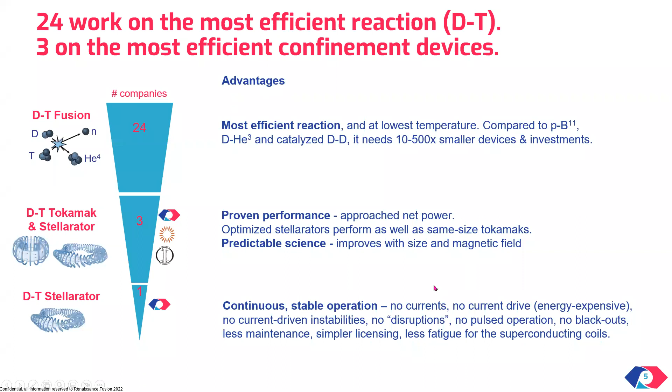This rotational transform in a stellarator is generated without using a solenoid in the center, but rather by deforming the coils. Early stellarators used to rely on helical coils that helically twisted the plasma and, as a consequence, the field lines.

More recent stellarators replace these sets of toroidal field coils and helical field coils with so-called modular coils, which I'm sure you have seen in pictures from Wendelstein 7-X.

These modular coils were originally introduced as engineering innovations to avoid very large helical coils, but they opened up a big space of new stellarator configurations, basically paving the way to stellarator optimizations with confinement comparable to tokamaks. So stellarators have reached tokamak-like confinement.

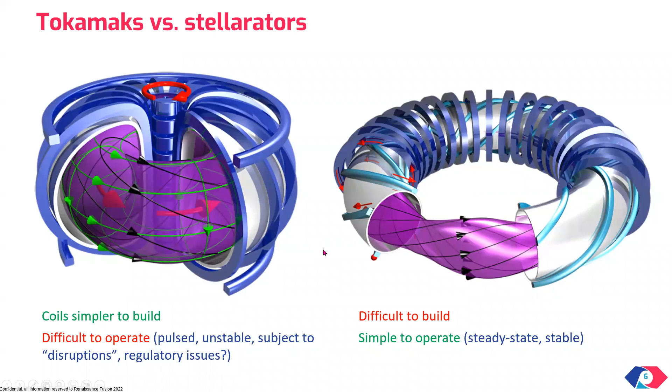The only Achilles heel of stellarators is that they are difficult to build. These modular coils are difficult to build, and this is in fact one issue that we tackle—the main issue that we tackle at Renaissance Fusion.

In the funnel that you saw before, as we were going down and explaining how we came up with this idea of making a deuterium tritium stellarator company, I was listing all the advantages. But as you go down in that funnel, at every choice, there are also challenges or issues.

So if you adopt deuterium tritium, you have to deal with the fusion neutrons that induce radioactivity in the solid parts of the reactor. Our solution to that is plasma facing liquid metal walls that absorb most of the neutrons.

By relying on tokamaks and stellarators, these devices are known for being large, and we make them smaller by means of strong fields generated by high temperature superconductors, or HTS. And finally, stellarators have a reputation for being complex, and here comes our simplification.

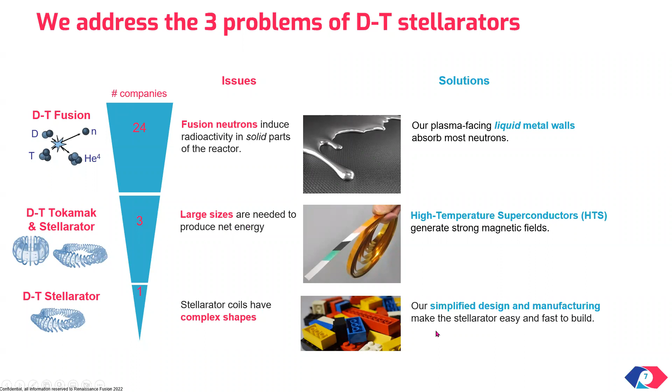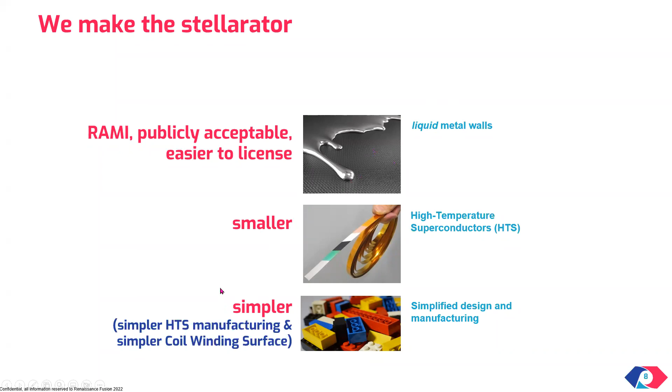So in summary, we are working on making the stellarator reliable, accessible, maintainable, inspectable, publicly acceptable, easier to license by means of liquid metal walls, smaller by means of high temperature superconductors, and simpler. Now, simpler here means two things, simpler HTS manufacturing and simple coil winding surfaces.

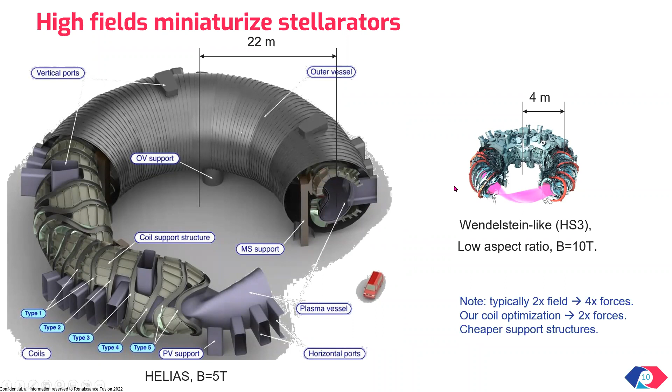Let me, so this is just an illustration of how dramatic the miniaturization can be. Let me start by explaining our innovative technique for simplified HTS manufacturing.

And for that, I need to start with the traditional technique of HTS manufacturing. So normally people take tapes, similar to tapes in audio cassettes, for those of you who remember that. So these tapes go back and forth in various machines where they are coated with various layers by chemical and physical vapor deposition processes.

The important layer, by the way, is the one here in black, REBCO, rare earth barium copper oxide. All the others have other functions. Then these tapes are combined in cables.

These cables are wrapped around to form a coil, and in the case of a stellarator, this is a non-planar coil wrapped on a non-planar table. These coils, by the way, are fabricated with millimetric or submillimetric precision, and these are objects several meters in size.

And then with submillimetric precision, they are positioned around the fusion device. So this is the traditional way.

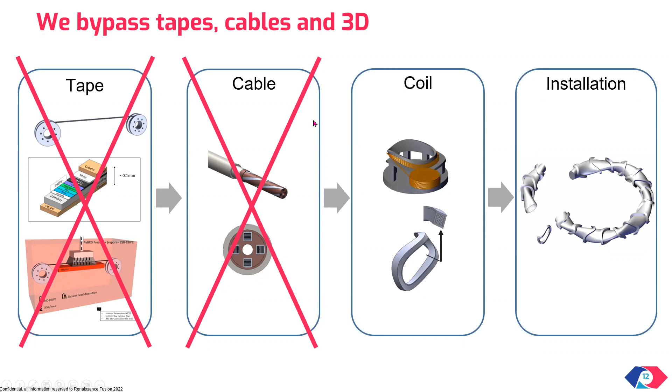We bypass the concept of tape and cable at Renaissance Fusion, and we directly deposit the coils on the vacuum vessel as follows. So we have two machines instead of 7, one for physical vapor deposition, depositing some layers, another for chemical vapor deposition, depositing other layers, in fact, multi-layers.

So in our stack, there is not only one, there will not be only one REBCO, but several REBCO layers. So this in itself is already an improvement. The process is much faster.

So the result of this deposition on cylinders is a cylinder that superconducts in any direction, in principle. But since we want the current to follow a specific pattern, what we do is with a laser, we engrave this cylinder. Effectively, we draw a printed circuit on this cylinder.

So these corrugations will guide the current on these cylinders, such that an array of several cylinders generates a stellarator field. Notice that the 3D geometry, or the 3D shape of the coils, has been replaced by two 1D manufacturing processes.

So the rotation of this cylinder, which is a 1D movement, and the scan of the laser left and right, which is also a 1D movement.

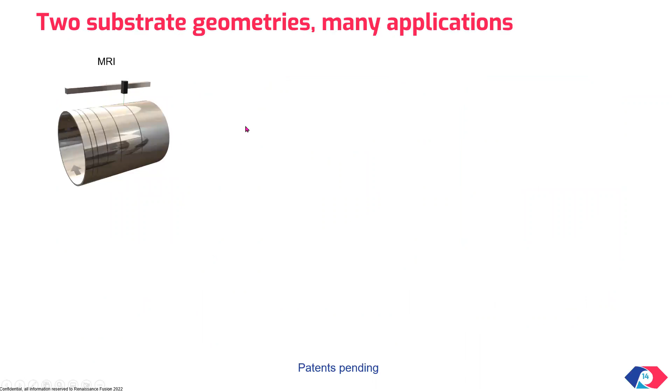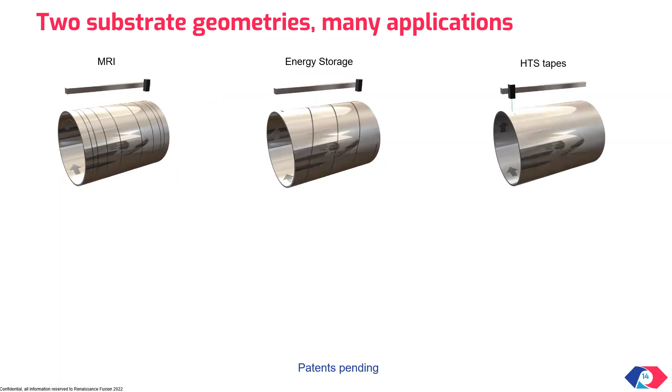This technique has advantages also for other technologies. At the end of the day, it's a gigantic superconducting printed circuit, and for different applications, different magnetic applications with different magnetic geometries, you just need different corrugation geometries, as illustrated in these videos for medical imaging, energy storage.

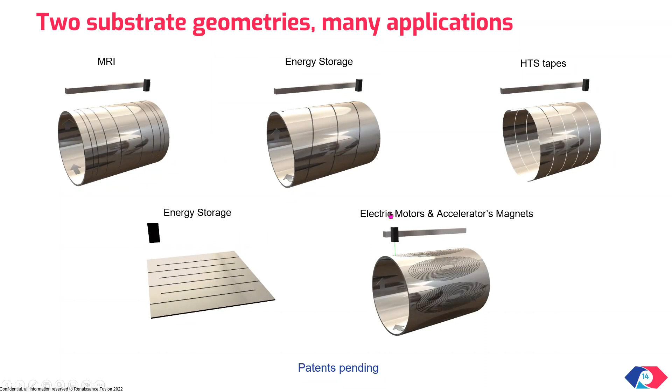You can even make tapes if you want. You don't just engrave on the surface, you cut all the way across the cylinder. And applications, of course, to electric motors, generators, and magnets for accelerators.

Conformal here means just parallel and expanded. For good reasons, by the way, because obviously higher order multipoles decay more rapidly with distance.

So by adopting a close-fitting coil winding surface, you avoid the issue that by being too far, you need a lot of coil shaping for the same amount of plasma shaping, which is good. The problem is that now these surfaces, and as a consequence, the coils, are very complicated.

Historically, coil winding surfaces were not that complicated, and in a way we think we can go back in time. We think some simplified surfaces can be more than sufficient, in particular piecewise cylindrical surfaces, which enable the idea of patterning directly on the cylinders.

In the next slide, you see a comparison of the performance of this conformal coil winding surface on the left and the piecewise cylindrical on the right. What you see on this axis is a metric of complexity on the surface. Not surprisingly, adopting a simpler surface, cylindrical versus conformal, results in higher complexity on that surface. Rather than adopting a complicated surface and simplifying the pattern on it, we prefer to adopt simple surfaces and therefore simpler manufacturing, at the expense of more complex patterns on those cylinders.

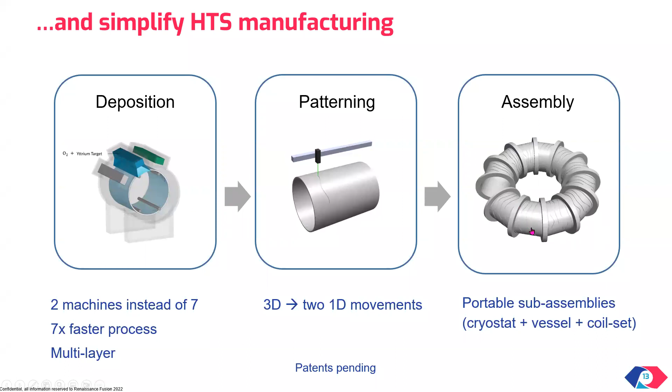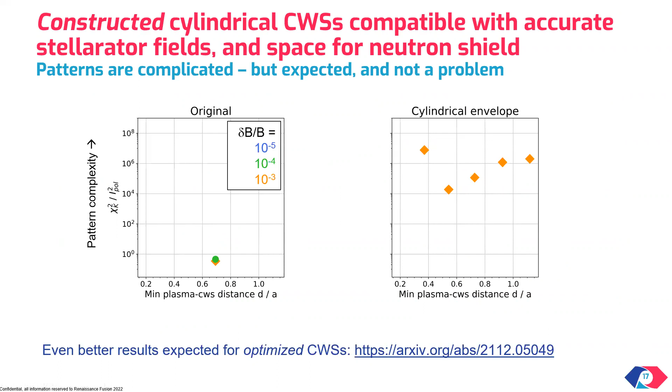At the end of the day, this means that on those cylinders you will need a more complicated zigzagging than you would have with 3D surfaces like the one in blue. That's it, but the laser doesn't care about it. This is for surfaces that have been constructed by trial and error, but with numerical optimization, we can do even better.

So we stop the neutrons. Liquid metals fall from the top of the cylinder, and they are forced to flow along the walls of the cylinder by means of J cross B forces, pushing it radially outwards along the cylinder. Because we have a strong B for free, we just need to apply a relatively modest J in that flow by means of electrodes.

Let me try to play this video, let's see. I hope you can see it. When we turn off the system, the liquid metal detaches from the cylindrical substrate. This is gallium indium tin, on a small cylinder of 60 centimeters diameter, but the basic principle is there. This is a 1 centimeter thickness.

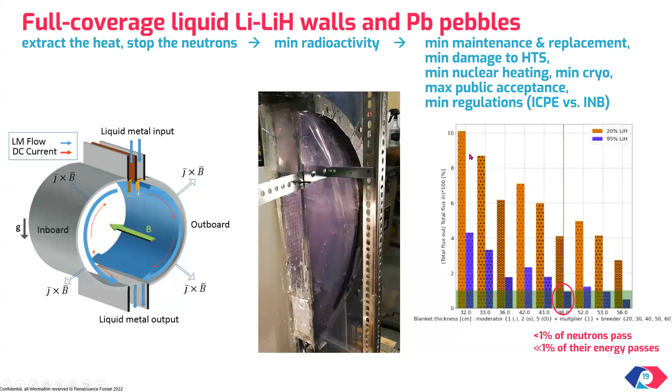I should say the thickness needed in a fusion device is on the order of 40 centimeters, for reasons of stopping the vast majority of neutrons and the energy they carry. By this liquid metal flowing wall, we minimize damage to the HTS. We minimize induced radioactivity in the device and therefore maintenance and replacement. We minimize nuclear heating, requirements for cryo, and maximize public acceptance because this minimizes radioactivity and regulations. So there are several advantages, and one bonus is that the extraction of tritium is facilitated.

So our wall is made of lithium hydride with suspended pebbles of ceramic containing lead. And why lithium hydride, you might wonder? Well, for reasons of reducing the thickness of the wall, but also it has a bonus, as I was saying. This is the phase diagram of lithium hydride, temperature on this axis, concentration of lithium hydride on the horizontal axis.

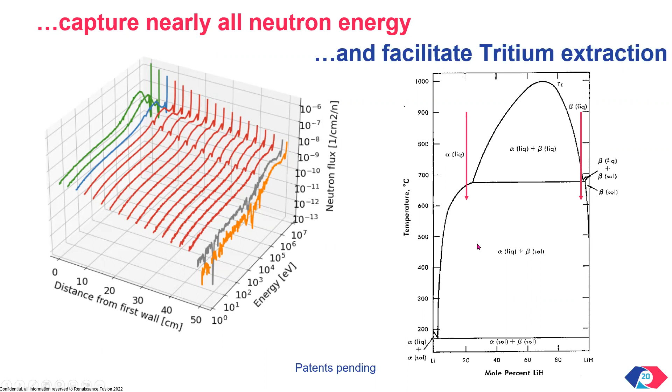The liquid metal is inserted in the stellarator at 700, it warms up to 900, then gets extracted and needs to be cooled down. Again, we need to extract the heat, we want to extract the heat. So in the process of cooling it down, if you cool it down a little bit further, you cross this phase transition by which lithium hydride and its chemical equivalents, lithium deuteride and tritide, precipitate. As a matter of fact, if you do it carefully enough, you precipitate only the lithium tritide. Carefully means fine control of the temperature. So you extract relatively easily the lithium tritide, and after that, the tritium.

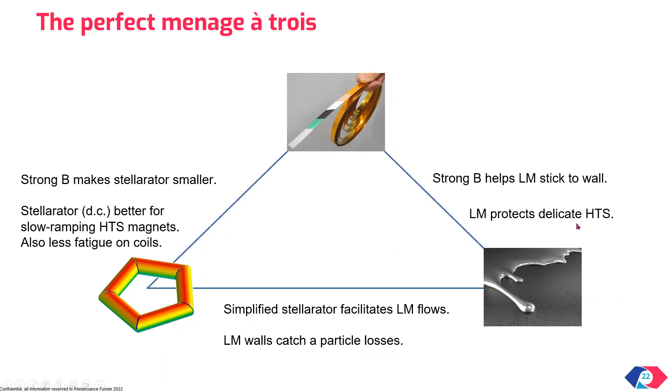I would like to say this is not just a random collection of 3 good ideas. These are 3 ideas that synergize very well with each other. Without entering into many details, I'll give one example: the strong magnetic field generated by the HTS helps the liquid metal stick to the wall, and the liquid metal protects the delicate HTS from neutron bombardment and damage to the crystal, which would degrade their superconductivity.

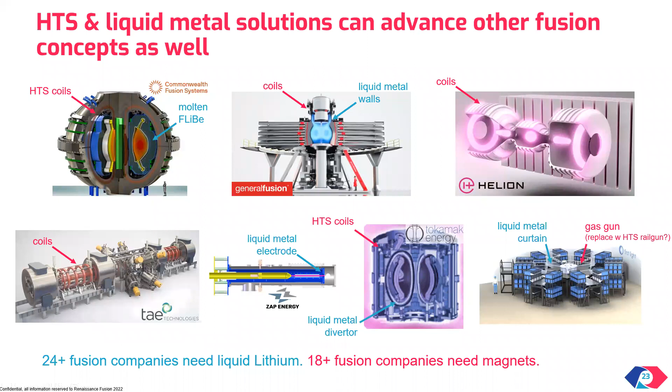This 3-pillar approach, I think, is more general to the fusion industry. Various fusion companies are pursuing different concepts, and it's not excluded, at least in my opinion, that the reactor of the future might have the divertor developed by one company, the materials developed by another, the coils from company C, etc. So this focus we have on HTS and liquid metals might indirectly facilitate the success of other companies which are also relying on, or might rely on, HTS and liquid metals in the future.

So this is our roadmap. We have a 3-phase approach. We want to put electricity in the grid in a retrofitted power plant, in a coal or a fission power plant, a dismissed power plant, 1 gigawatt electric. We are a bit unusual in that sense. If people are interested, I can explain why we are targeting such high power.

How do we get there? By first demonstrating the building block of these stellarators, these cylinders. So this is our big objective in 2 years from now, to put together the HTS technology and the liquid metal technology. So this is a cylinder with HTS deposited on the outside, generating a strong magnetic field, and having on the inside the liquid metal flowing as shown before.

So to give an idea, this is a 1 meter diameter, 1 meter long cylinder. Enough to start building a small stellarator. Then as we learn to build larger and larger cylinders, eventually we will build the actual power plant, also based on what we learn from the smaller experiments. So by the time we are ready with these cylinders, we want to be ready with a stellarator design. We are working on that right now, and we're modeling the stellarator right now.

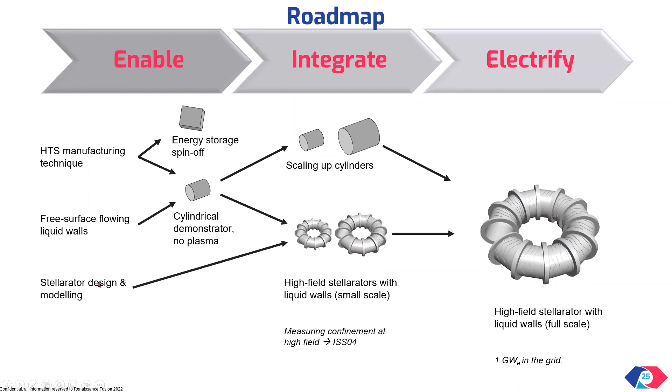So we have opportunities in all 3 pillars, technological areas. Some of them are listed here. Others can be discussed if you just shoot me an email. In general, we are looking for talented, bright, energetic, resourceful people. So from any age. And please do contact me later.

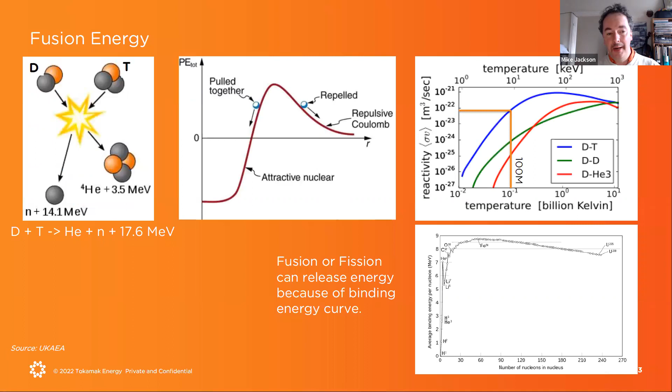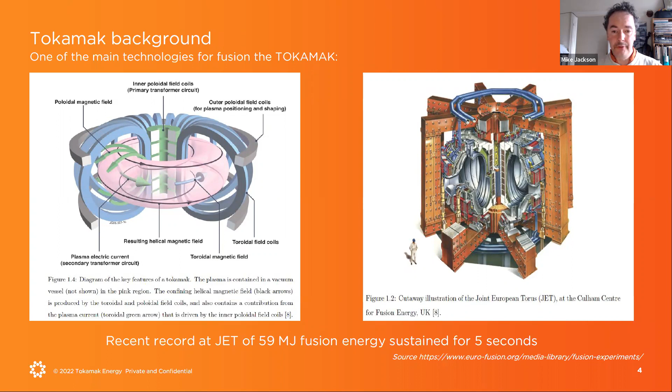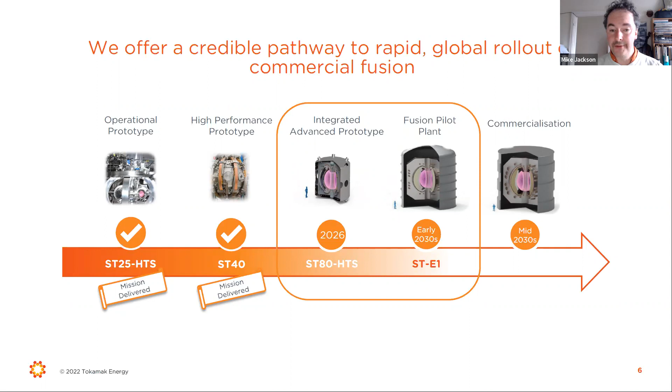This is our roadmap, if you like. We've already done ST25 and ST40. We've just announced we're going to build another one called ST80. So that's what the job is now.

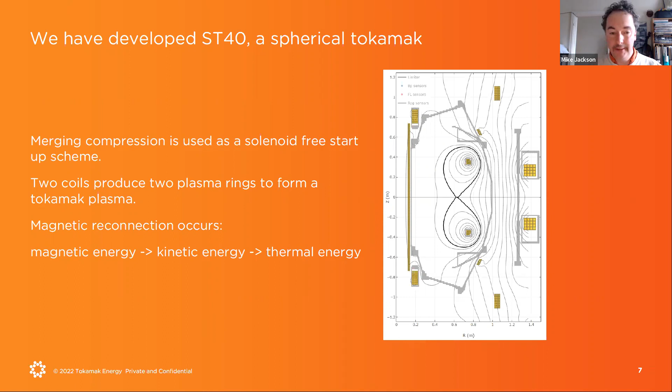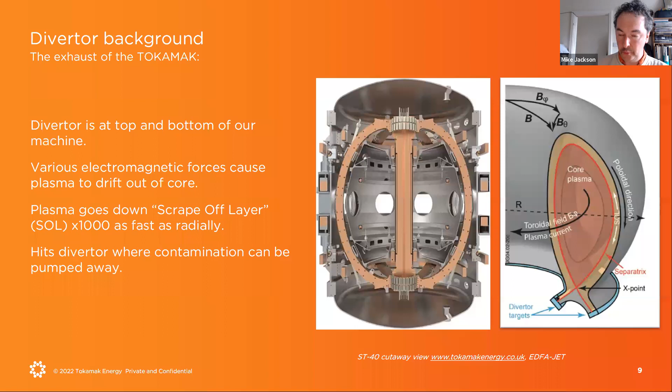So by introducing extra magnetic fields to cause this X point and crossover, you can have a divertor down at the bottom, and the transport down this scrape-off layer, just inside the last closed flux surface, means that all the ions whiz down the magnetic field and hit the divertor, where you can safely dispose of them. They're not going to go and damage your plasma too much, but it does mean that the divertor targets have to be able to deal with these really high fluxes of ions.

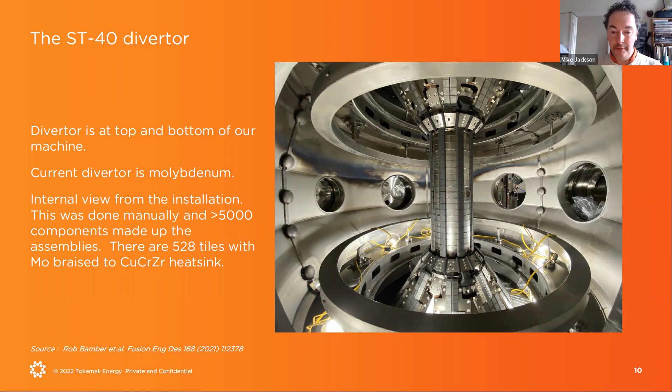And each of these is molybdenum brazed to a copper chromium zirconium heatsink. And actually, the engineering of this is remarkably complicated, and each bit needs research and development to get the braze right, to get the shape of the molybdenum, machining, everything else. So just to illustrate the kind of complexities we're dealing with. So I'm working in that team on the divertors.

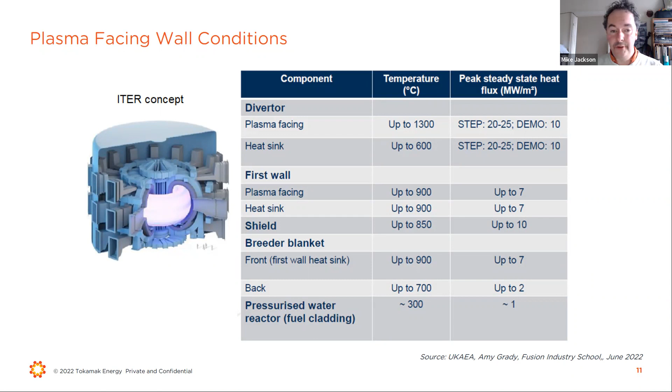Just a quick slide there to show the kind of temperatures and heat fluxes that we're going to be facing. Temperatures of hundreds of degrees and heat fluxes of tens of megawatts per square meter. That's a very challenging environment for the divertor surface. And these are the sorts of designs. These aren't Tokamak Energy designs. These are from the literature, but generally speaking, we're looking at tungsten. Molybdenum is okay.

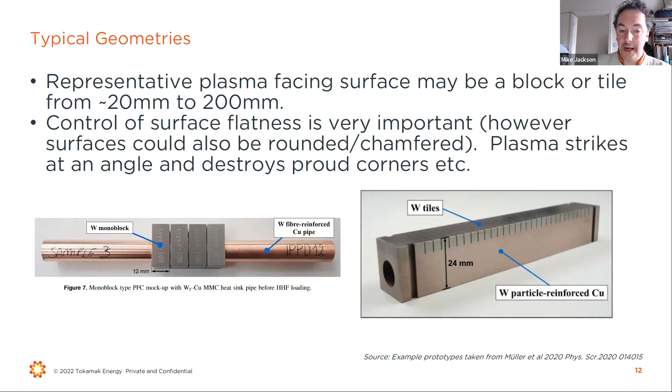Tungsten's better because the melting point's much higher. And on the left, we have a sort of monoblock design, which is a lump of tungsten that acts as the armor that resists the plasma. And then we've got copper to take away the heat, act as the heat sink. And on the right is a kind of tile design with the same kind of idea, armored tungsten on the top and copper below. I am skipping through these, but I'm hoping you're getting the kind of idea.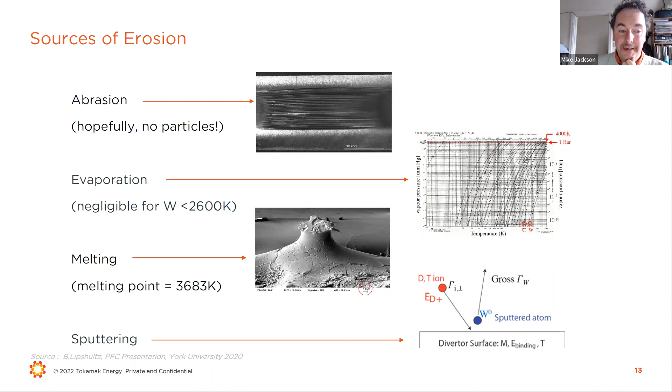This is the sort of thing I've been working on myself, the erosion of those tungsten surfaces. So again, I'm going to skip through it. We do have some time for questions at the end, so you can always shout and ask me stuff. Basically, this is telling us that you're going to get evaporation and melting if you get very hot events. And the main problem is sputtering, though, if you can contain those temperatures down to the sorts of temperature we want to keep them at. And sputtering is where your incoming ions are causing enough energy to go into the metal lattice and causing atoms to leave. I'm going to basically skip through all this.

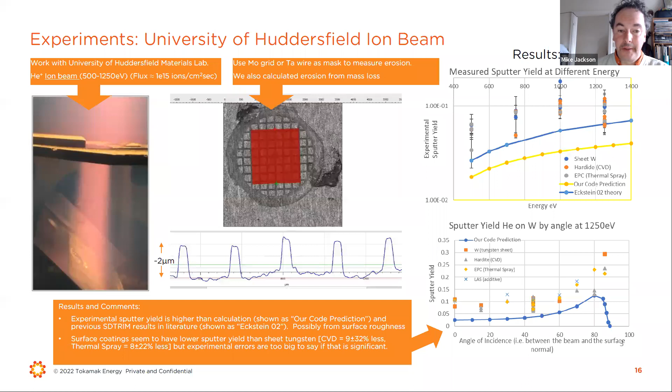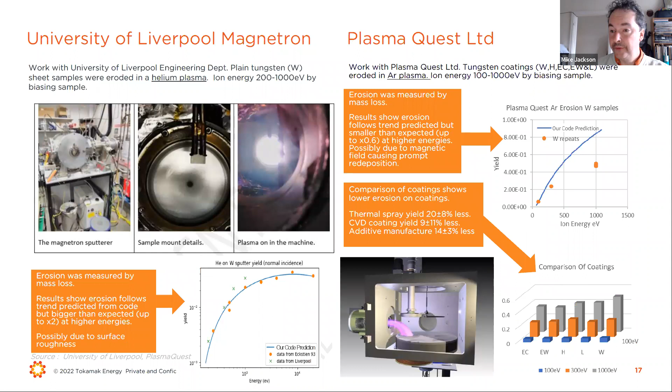I'm going to skip through these next 2. This is basically more research that we've done. And to show, we're collaborating with the University of Liverpool. We've been collaborating with PlasmaQuest, which is a private company that makes plasma ion sources, the University of Surrey as well. This thing's quite cool. It's a focused ion beam, but you can erode the surface again and have a look at the structure.

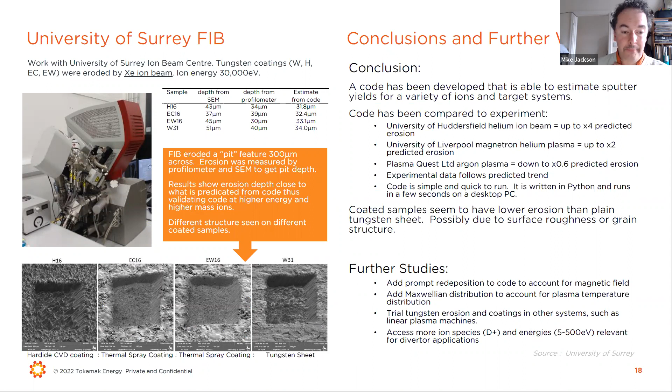And the agility and creativity angle is basically we're looking for inventive people, interested people, enthusiastic people that are going to come up with ideas and not be afraid to try them out. And it's a very supportive environment. So if you come up with totally crazy thoughts, that's fine. And if it all goes wrong, that's also fine as well, because we've always learned something.

There's a certain lack of diversity. Male-female ratio is a bit off in engineering in general. We've got a very diverse team. In the team I work with, we've got a person from Russia, one from the Czech Republic, 2 from Spain, 1 from Sweden, 1 from Malaysia. So we're very sort of diverse in that respect. But that's the whole point. We need more and more people with diverse and interesting backgrounds to come and join, really.

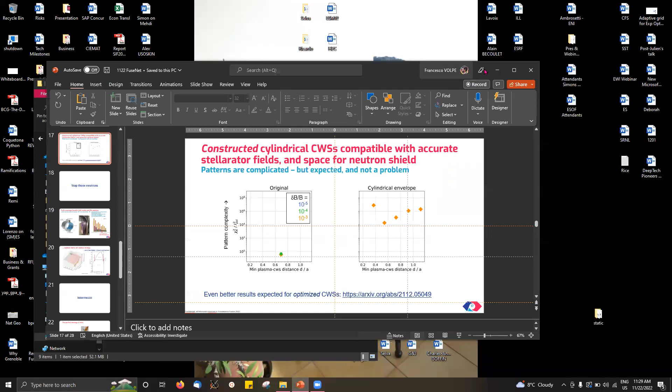Sorry about that. So this slide that I showed in a hurry was actually showing the color coding that tells these points have field accuracy of 1 part in 10 to the 3. For Wendelstein, for example, they achieved 1 part in 10 to the 4, in a particular way of defining delta B over B. I prefer not to enter into excessive detail, it might take too long, but we think with numerical optimization we will get there. Thank you.

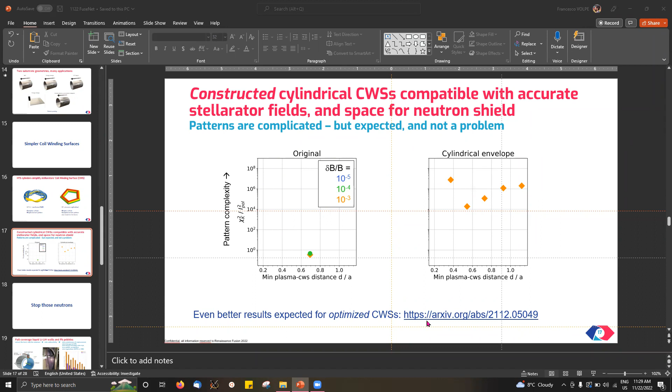Thank you. I'm going to take one last question because we're moving out of time. So there's one very interesting question here, I think for both of you: how does private industry balance the need for knowledge sharing to advance the fusion industry with the financial pressure to make advancements proprietary? I mentioned the funding you receive, also from private investors, so how do you cope with this relationship?

Well, for us, there's quite a lot of stuff that is common. Tungsten surfaces are pretty well known, so we rely on research done in the public sector, and we also publish our own data. That stuff I was showing is being published in a scientific journal. But certain things, if we identify a key invention, you patent it, and that gives you an income stream in the future. I'm sure Francesco noticed certain things patent pending in his presentation. We're exactly the same - certain things are patentable and hopefully will generate an income stream in the future. But an awful lot of it we share, we publish, and a lot we have to collaborate on. If we're collaborating with Liverpool University or whoever, we agree to publish this data at the beginning. That's kind of how we work.

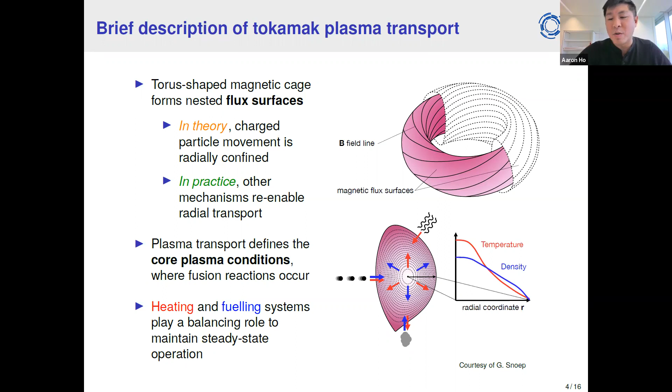So if I were to draw a very basic structure of what we're talking about, let's say we have just a finite volume in a 1D geometry, so things can only travel in one direction, more or less. We want to count how much is inside that volume. In the 1D geometry, there are things that can enter and leave the volume, and then there are things that may spontaneously be created or destroyed in the volume.

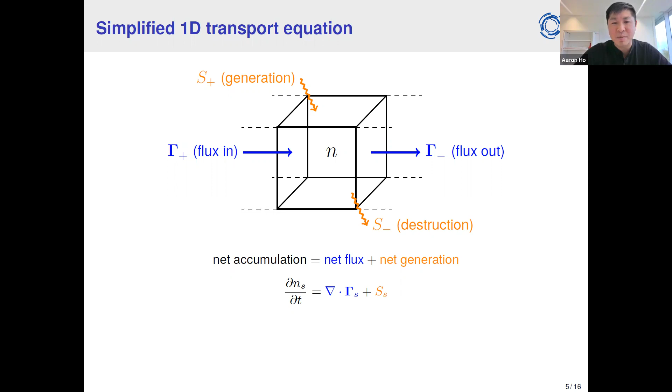So here's just some mathematical notation, but we can say that if we want to quantify the rate of change of this quantity in the volume, then it's just the summation of the net transport, the net flux that goes in and out of the volume, plus the net generation - what is spontaneously created minus what is spontaneously destroyed. This can be written as a very neat, simple equation, shown here with color coding to help you understand what each term means. Of course, this is extremely simplified, but it is what we consider the 1D transport equation.

This is also called the continuity equation, also called the conservation equation. Some people even call it a fluid equation because it's dealing with fluid quantities, but they all really mean the same concept as far as plasma transport is concerned.

And to add a bit of complexity on top of it already, we need one of these equations per fluid quantity - so this would be density, or temperature, or bulk momentum. And then we need to duplicate it again for each species in the plasma - so this is the electrons, the deuterium ions, the tritium ions, and then all the impurities as well that may be present. So this quickly escalates in the number of equations that we have to solve for a simple, even 1D, transport problem.

And of course, once we add multiple species, then we add cross-species transfer terms, which is like electrons interacting with ions, ions interacting with other ions, stuff like that. We usually stuff that into the net generation term, but that's just semantics - the fact is we still need to account for them.

So this equation gives you a very brief overview of how we would look at a plasma transport problem. It's basically just a balancing equation of how much is being moved from a volume, how much is being created from a volume, and then how much is just accumulating in the volume.

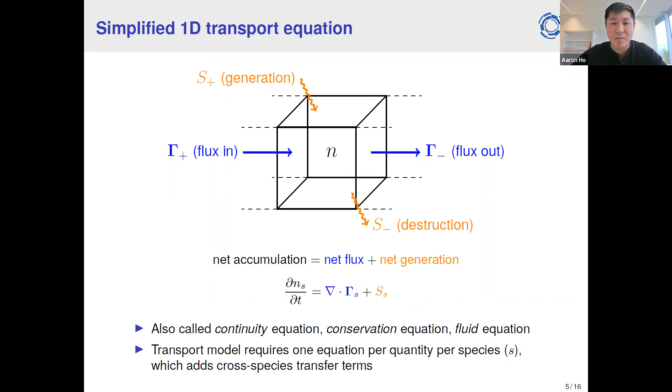But of course, I painted a very, very simple picture, because each of these terms - there's only two in the equation - is actually a collection of a number of different plasma physics phenomena, or just normal kinetic transport phenomena. And those each have their own codes and ways of calculating them. Of course, the actual numerical value computed by these phenomena, by calculating the physical equations that govern them, may depend on the values itself - so it may depend on the density and the temperature, and on these quantities for other species, etc. So it becomes very, very quickly a nonlinear system, which is intertwined and intercoupled.

So while I've laid out a very simple problem, once you get into the details, into the weeds, it becomes extremely complicated to keep track of everything and make sure everything connects well, because there's also different orders in which different time scales and length scales, in which all these phenomena behave, and making sure you account for all of that inside your numerical model gets quite interesting, let's put it that way.

And on top of that, there's also gaps in the theory. There are certain physical phenomena which we don't fully understand yet, or at least it cannot be fully explained from what we know from the equations we already have at our disposal. So the research usually results in phenomenological models, which are specific models designed to describe one observed phenomenon, maybe not from first principles, maybe empirically, but it describes only this phenomenon. And then you have to somehow translate that into its meaning for a transport equation before you can include it inside a model which does the solution of the transport problem.

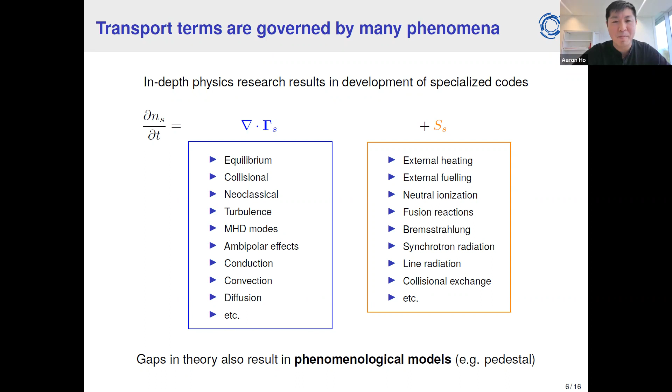One example of this is the pedestal itself, and for those unfamiliar we'll talk about it a bit later. But now you have all these different codes, all usually describing its own small specialized portion of the plasma physics, and we have to integrate them all together into basically one giant code.

which solves the transport problem. And this we call an integrated model, and each of these components we call sometimes modules, here in the italics. This process of combining all the different codes together combines the physics domain knowledge required to understand the code itself and how it interacts with the plasma, as well as a fair amount of software engineering.

because there's oftentimes numerical issues or certain parameters are not quite lined up. How do you do the connection of the different numerical schemes so that they're consistent with each other? All these sorts of things kind of pop up, which only appear when you try to integrate a model into a bigger framework, and generally don't appear when you're developing the specialized code itself.

And so these considerations become important and very difficult to handle if the code was already designed a certain way, and you have to somehow jerry-rig it to fit into the bigger framework. This creates a lot of frustration, of course, but also is an essential part of this framework development. And so consistent solutions, after everything is put together, still require a lot of iteration.

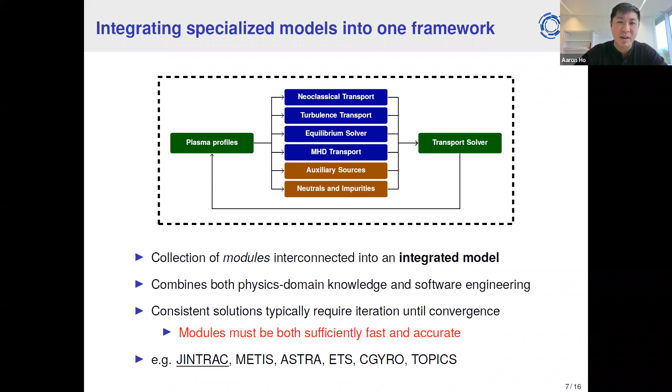So how JINTRAC does this iteration is it does an explicit time evolution, so that basically we just evolve the plasma in time until steady state conditions are achieved. You can see an example of one of these simulations that I've performed here, where we start with an initial condition and we just kind of let the code compute with all of the different components until it reaches sort of a flat response at the end of the time evolution.

Of course, this is not the only way to run the code, because once you have an explicit time solver included in your transport code, then it opens up applications to study dynamics, so non-steady state plasmas. As you can see here, there's work done by Florian Koechl, who kind of modeled the full plasma discharge from the ramp up into an LH transition, then the flat top here, and then the ramp down, moving out of H mode.

And this is pretty much a full discharge from build up, creating the plasma, then putting the power into the plasma, reaching this H mode, which is the high performance regime of the tokamak plasma, and then ramping down from there to a safe termination.

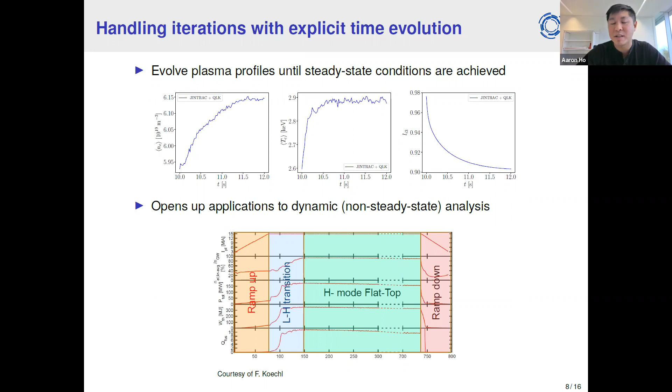And so this type of simulation is hard to put together because of the number of modules and the number of concerns that you have to get all the numerics correct. But it is capable of doing it, but I will say for certain that it's definitely not routine. It still takes a lot of effort to put together one of these simulations, even though the code has the capability. So we're moving in the direction of trying to make it more routine and try to understand the different settings required to do this simulation, but it is quite difficult to do still.

And so once we have all this together, when you run a simulation, it's really great when it works because it's quite complicated and you get to see how the plasma evolves in time, and even compare it to the experiments themselves, because most of the diagnostics inside a fusion plasma device measure these fluid quantities, either density or temperature or flow of different species, etc.

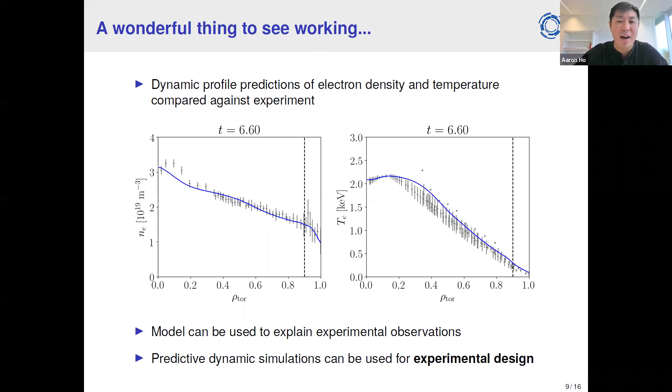And to this day, we're not sure why it happens in terms of what is the mechanism causing this runaway effect, but how do we make it robust so that it doesn't happen when we don't want it to? That's a bit of a numerical trick, which isn't super robust. So this tells you that there are still solutions we apply inside these models, which are basically smoothing effects or multipliers to different physics coefficients. And it adds a heuristic element to choosing the appropriate model settings for running an integrated model.

And that's why getting these models to run routinely is still a work in progress, because we need to gather more statistics on running the models for different types of discharges, different plasma regimes, even in different machines, and validating the code against their data in order to set these heuristic components to have a recipe that is easy to follow.

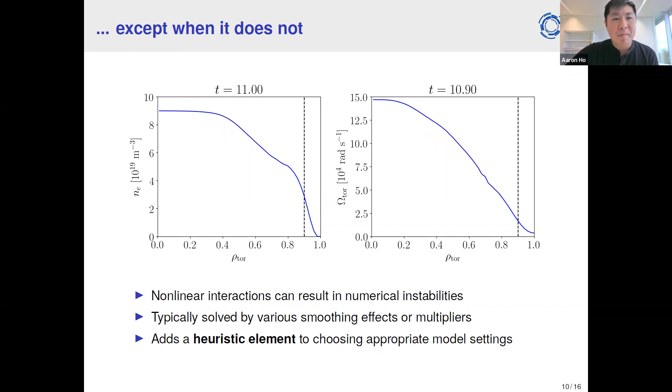But then, of course, I think there might be someone in the audience that says, okay, these fluid equations are also derived from something more fundamental, which is the distribution function itself. So why don't we just simply evolve the distribution function? I think there is a code, JOREK, that does it, but not for turbulence yet, only for MHD. But the main problem with that is such an approach is infeasible in practice.

And this is what leads to the specialized module development in the first place, because if you wanted to calculate plasma transport with the fundamental distribution function equation, it would take way too much computational time to actually get a useful answer out of it, or an answer that is meaningful for whatever studies you are attempting.

There's always a trade-off between the speed and accuracy of the model, and arguably the complexity as well. So useful predictive capabilities for integrated models demand both of them. This is a dilemma, because if the trade-off is always there, aren't we limited in how far we can progress? This is where cross-domain competencies become very important. There are, to my discernment, three different ways we can solve this dilemma.

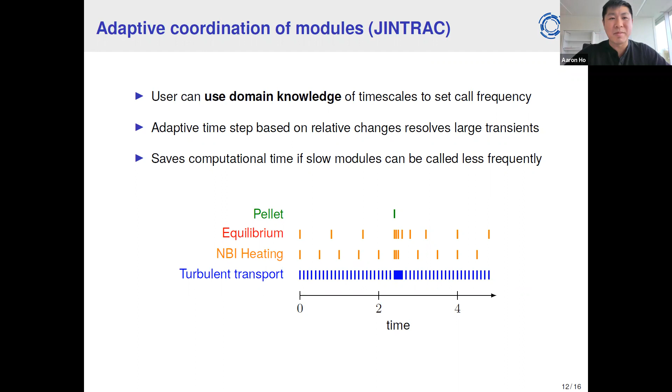So what can be done, for example in turbulence models, is simplifications to the gyrokinetic equations used to calculate the turbulence itself. They were simplified in a manner that focused on reactor-relevant physical regimes. Two examples are QuaLiKiz and TGLF. They compute the turbulent transport behavior due to local plasma conditions. For each point in the plasma, there are usually gradients, and those gradients drive micro-instabilities which grow and create turbulent effects. Luckily, studies show correlations between the linear behavior of these unstable modes and their nonlinear behavior, which allows us to capture the full turbulent evolution using semi-empirical rules.

And that allows the calculation of this turbulence phenomenon to be sped up like 1 million times, which is incredible, because then at least we're kind of on the order of a second per calculation, which is still too slow for the applications that I was talking about at the very beginning of this talk, but is much faster than what we used to have.

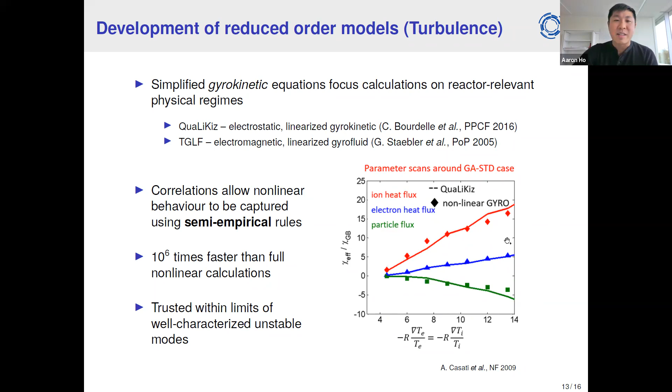And so you can see here a bit of proof that the dots are nonlinear simulations for the turbulence, and then the lines are basically using this semi-empirical rule with the linear calculation. And it's only tuned for one point, which is this first point in the beginning, and the rest of the trends follow quite well. So that's one way we can help to speed up the code as well.

And the last one is by using machine learning. And this is something that myself and my colleague Karel van de Plassche here at DIFFER have been working on. We took this QuaLiKiz code and basically tried to design a neural network that would make a surrogate of it, that would take the same inputs and compute the same outputs, but significantly faster.

And so it combines the expertise of data science. So how do you collect your data? How do you work with large amounts of data, as well as plasma physics, because you need to understand a bit of the underlying mechanisms in order to make the network work.

And so one example of this is that there is a domain knowledge that turbulence is driven by saturated instabilities, which exhibit this threshold, so on and off behavior. So either turbulence is present or it's not. And so this gets translated into features of the neural network model itself. So Karel did this, which is very nice work.

He defined these flux ratios, which allowed us to turn all the transport channels on and off at the same time by just tying them to a single channel. And so if that single channel predicts unstable, then all of them turn on. And if it predicts stable, then all of them are off. And that turns out to be very important once you try to integrate that resulting neural network model into an integrated model.

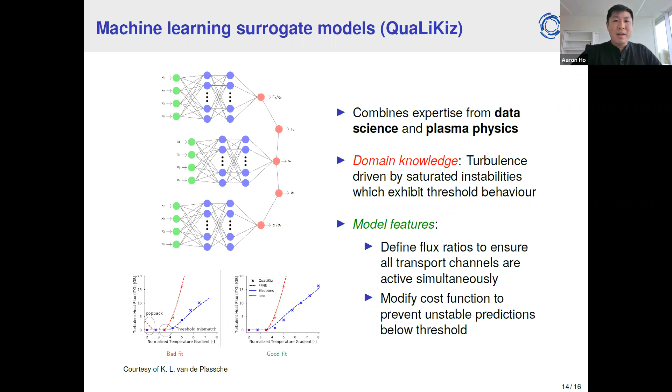And having the domain knowledge allows us to separate that data in a way that the important correlations are given the most focus and captured best, and the ones that are not important or the ones that are noise are even discarded, right?

And so one final thing that I'm going to talk about with these integrated models that we're starting to move into is verification, validation, and uncertainty quantification. So verification, just for terminology, is a comparison of simulated results against other computations. So this is comparing against other integrated models or against other types of plasma profile computations.

So this is one way we can help to understand which of these predictions are more robust and can we rely on better when moving forward to using these predictions for design purposes.

So I'm going to end here, and just some takeaway messages for you guys. If you didn't follow all of the technical explanations, that's fine. These are the main points here: the predict-first full device simulations are starting to become reality via these integrated models. And this is an incredibly exciting thing, because that means we can use these models to help us design future reactors or design experiments in future reactors with greater accuracy and greater confidence.

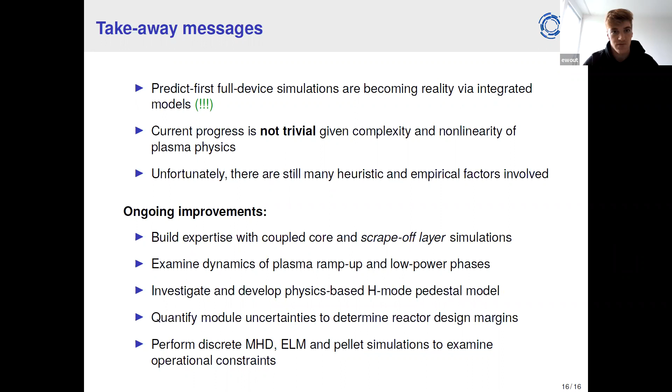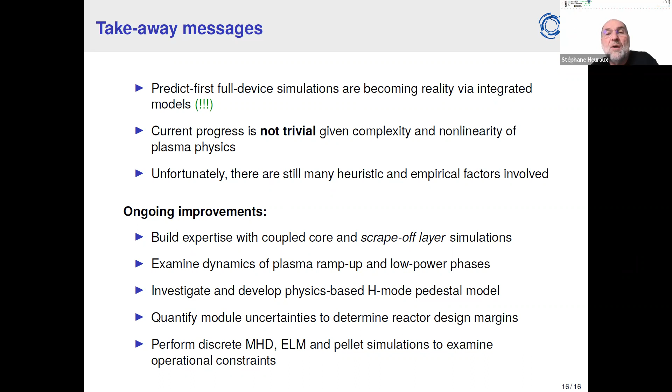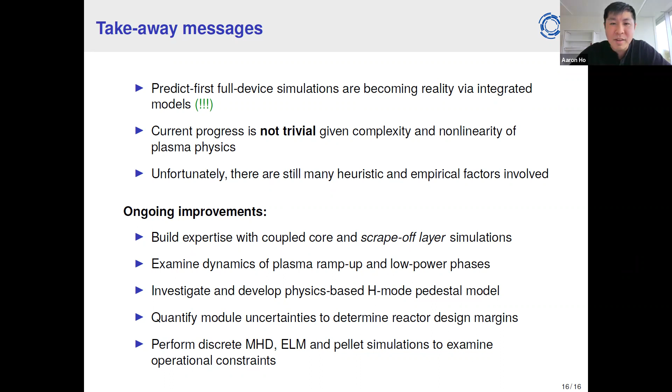Any more questions? Yes, I have one. Concerning the accuracy, you mentioned that you make error bars, but if the training of the neural network goes outside of the domain you have studied or learned, what happens? Yes, so these error bars were not generated using the neural network, but it is definitely a concern with the surrogate models that if you go outside the training space, they start predicting very strange values, and your simulation can really diverge.

That is true. We are working on different ways to do this uncertainty quantification for the neural network surrogate models themselves. That way, when you run the neural network model, it provides you the uncertainty, which should tell you whether it's starting to move away from the training space. And you can use that information when coupling it with the integrated model: if the uncertainty is beyond a certain threshold, then we simply don't trust the neural network here and revert back to using a more rigorous physics-based model. All right. Okay, thank you very much.

Any more questions? I think there was one in the chat. I can read it out. Do you focus only on tokamaks? Yeah, unfortunately, yes. Personally, I focus only on tokamaks. In fact, a number of these codes that I mentioned are specifically for tokamaks. They assume axisymmetry, so it boils down to a 1D transport problem in the 2D equilibrium. I think there may be frameworks being developed for stellarators, which include 3D geometries, but I am not too familiar with them myself. So yes, I do focus on tokamaks, unfortunately.